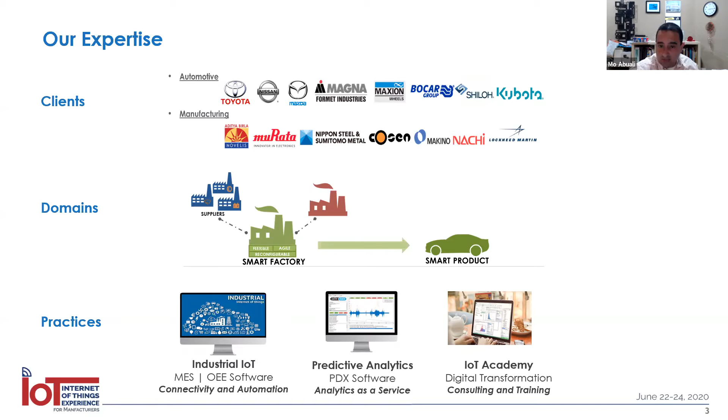I personally have been in the industry for about 20 years. I've worked with companies like Toyota, TMMK, and conducted projects with a lot of automotive tier suppliers, many large, but also many smaller manufacturers, like the Detroit Manufacturing Systems. Isaac will introduce the company later. It's a mid-sized manufacturing company.

So our agenda for today is really four things. I'm going to preface the presentation by giving some introduction and definitions around what is the Internet of Things, what is industrial Internet of Things, and what is the role of technologies like predictive analytics, OEE, and manufacturing execution systems. We want to talk about digital tools that can support any manufacturer to mature their digital journey in a phased approach, keeping return on investment in mind.

And then I'll hand it to Isaac, and he will discuss his journey, personal journey, and the journey of his organization, Detroit Manufacturing Systems, along digital transformation.

So let's get started. The field of Internet of Things is by no means a new field. It has been around for many years, many decades. We've been monitoring safety critical assets, machines, and components for many years, even though it was not called IoT, but there has always been the use of data collection, the use of the internet, and the use of connectivity to collect data from jet engines, trucks, airplanes, homes, cars, power plants, nuclear operations, etc. So the Internet of Things is a field about using internet connectivity and analytics to cover all industries, all things, and all devices.

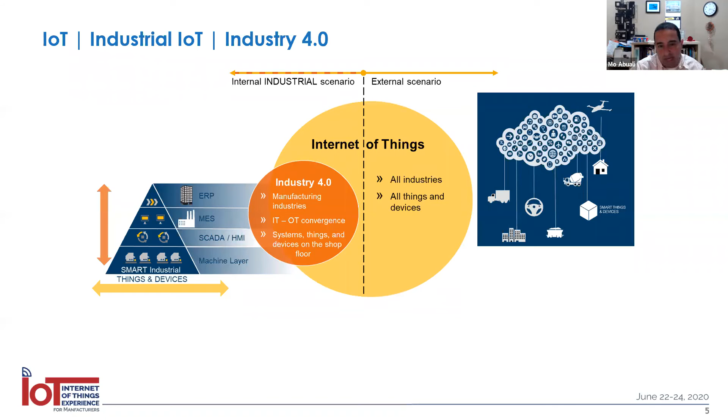Merging and converging information technology with operational technology, IT and OT. Later, Isaac is going to talk about their story of how they were able to make that convergence happen between IT and OT. So Industry 4.0 is a strategy, an initiative for manufacturers today to start adopting industrial IoT practices and improve productivity.

So in a nutshell, when we talk about an Industry 4.0 or digital transformation strategy, we're talking about 4 pillars that manufacturers today should keep in mind as they evolve their maturity on the digital horizon. We usually start from the right and go backwards. We start from the ROI, the return on investment.

So what is the business case? I will show some examples of improvements in uptime, improvements in OEE, reduction of scrap and quality issues, improvement of spare parts. Technology adoption and digital maturity must be able to impact your business bottom line, which is your P&L, your profit and loss statement.

And then we go backwards to connectivity. Are you connected? Are you collecting the right data that is meaningful for the business case you're trying to achieve? Next, we talk about analytics. Now that I have the data, what do I do with the data?

How do I have real-time metrics? And how can I predict future behavior or future issues down the road? Once the strategy is proven on a smaller scale, maybe a pilot scale, we talk about scaling that technology. We talk about architecture, rolling it out to more machines, more factories, more geographies or continents across the world. So what's the technology architecture of scaling that solution?

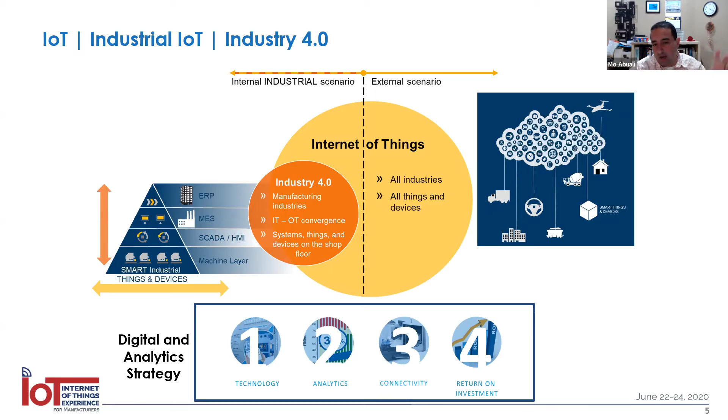So your business case, getting connected, doing analytics, and deploying the right architecture for the technology. These are the 4 key items I'd like to touch upon. And then Isaac will educate us on how practically they were able to do this within their operation.

Different organizations have different namings. GE refers to it as the Brilliant Factory Initiative, for example. But I want to give a very simple definition: Industry 4.0 is about combining traditional manufacturing practices today with the technological world. At its heart it's about technology and process, but also about people. The right mix of people, process, and technology, and how this transitions from an Industry 3.0 to a 4.0 domain, is our approach and how we see manufacturers being successful.

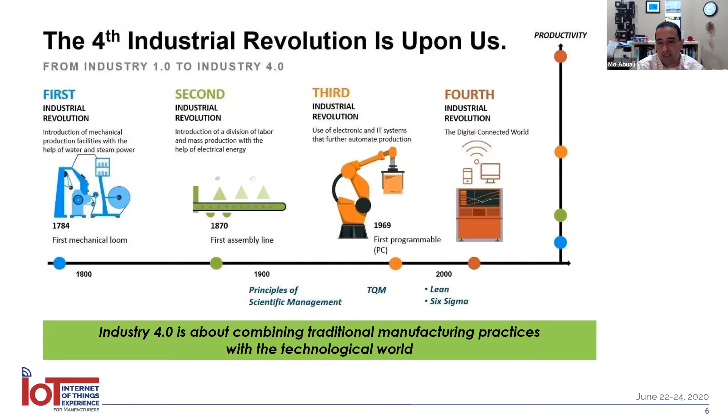We see a lot of manufacturing environments today starting to become more automated, moving from operator-controlled to operator-intervened, to even a lights-out manufacturing operation. I heard an interesting naming - they called it a dark factory, a lights-out operation that may not require operators to actually control the machines. So it's important to understand the maturity around the people side and the general strategy of evolving that element of the operation.

Then we talk about process. We're seeing a transition from reactive thinking, short-term thinking, manual processes, to a more proactive, scheduled, long-term approach to running your process, to even self-optimizing processes where data is connected automatically, decisions are made automatically, and decisions may be fed to the machine or line automatically, so the line can have a self-optimizing approach to running the operation. So there's an evolution on the process side, and then there's the evolution on the technology side.

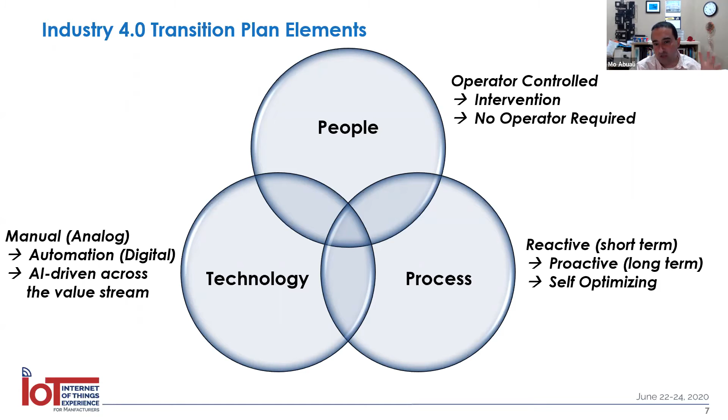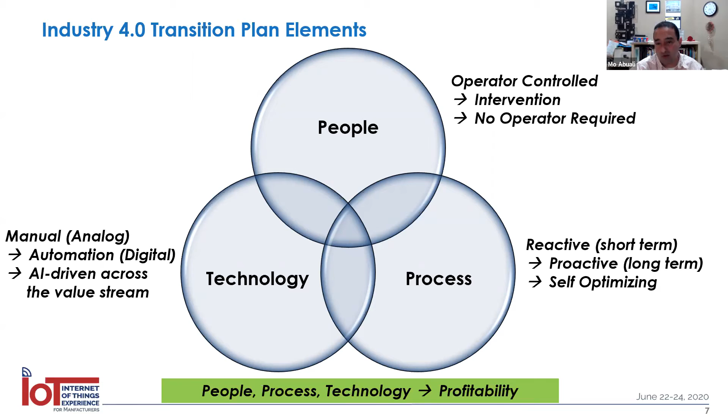But we believe that it's important to understand the digital maturity across your people, technology, and process. Usually the best transition or transformation to Industry 4.0 is governed by your weakest link. So if people is your weakest link, it's important for the company to focus there and make an evolution, versus trying to deploy technology in a factory where the people side of the coin is not ready. With the right recipe around people, process, and technology, there's a quicker approach to achieve ROI and profitability in your digital transformation journey.

So speaking of ROI, it's important to start with the business case, and it's important to track metrics. OEE, overall equipment effectiveness, is a key metric today in manufacturing. By collecting data and having visibility, and delivering the right information to the right person at the right time, the OEE metric is a key metric to be tracked in real time and to be improved.

Predominantly, uptime is a key metric within OEE - availability, performance, quality. So uptime is a key metric for some operations. We are also looking at using analytics to improve maintenance activities. By catching, detecting, and reducing unplanned downtime using analytics, there's a great opportunity to optimize maintenance activities and to move from a reactive maintenance environment to a predictive and preventive maintenance environment.

We see manufacturers tie into their spare part inventory by having a data collection and predictive approach to monitor their assets. There's no longer a need to keep a high value of spare parts waiting for things to fail. We see manufacturers using analytics to drive reduction in their spare part inventory and being able to be predictive in the replenishment of new spare parts.

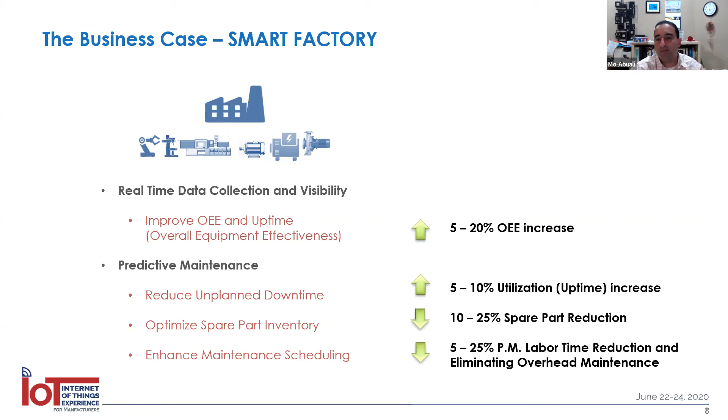We see manufacturers optimizing their maintenance schedule, moving from a time-based and reactive maintenance approach to a more usage-based, predictive, proactive maintenance approach. And the numbers I'm showing here are true numbers from manufacturers today, large and small, who have embraced analytics, connectivity, and data collection.

And they have seen immediate improvements anywhere between 5 to 20% in their overall equipment effectiveness, 5 to 10% in their utilization, reduction in spare parts of almost 25% by being able to optimize maintenance and use analytics, and reduction in labor time.

When we used to work in automotive plants, when you go and fix a machine, you have a very strict time-based schedule, and you would go in on a robotic, for example, and change the bearing in all 6 joints of the robotic. But now that we're able to sense data from the robotic and predict that a specific joint is going to fail before it fails, you can reduce the labor time, fix the right area in the robotic, and reduce your spare parts.

So it's a maturity curve, a phased approach for your digital journey, but it all starts by getting connected, analyzing the data, and making proactive decisions. Some manufacturers have eliminated overhead maintenance. Due to the time-based schedule of maintenance, they used to run maintenance on weekends, Saturdays and Sundays, but using analytics and making optimizations, they've actually been able to eliminate weekend maintenance and drive a just-in-time maintenance approach to their factory.

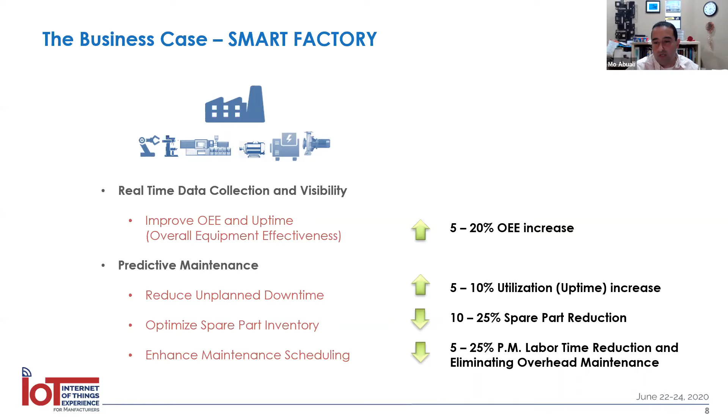So start with the business case and have the business case dictate where you are today, and then what technologies should be enabled to support you to digitally mature in your journey.

I want to touch on a few technologies just to give you a feeling. I want to touch on connectivity to the machine layer. I want to touch on data collection and metrics. I want to briefly touch on manufacturing execution and predictive analytics. I want to give a hint to some of the digital tools that are around today.

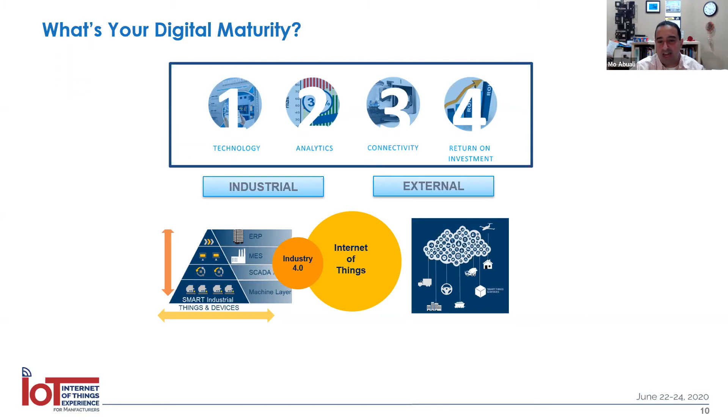I'm going to start from industry 3.0 up to industry 4.0 technologies. The reason I'm doing this is, we believe those four pillars you see here are indicators of your digital maturity.

We have an assessment approach when we work with clients where we do a digital assessment. During the assessment, we evaluate and benchmark where the manufacturer is regarding connectivity, acquisition, metrics, and MES, using that to create a digital readiness analysis and report to support the manufacturer moving to the next level of the maturity curve.

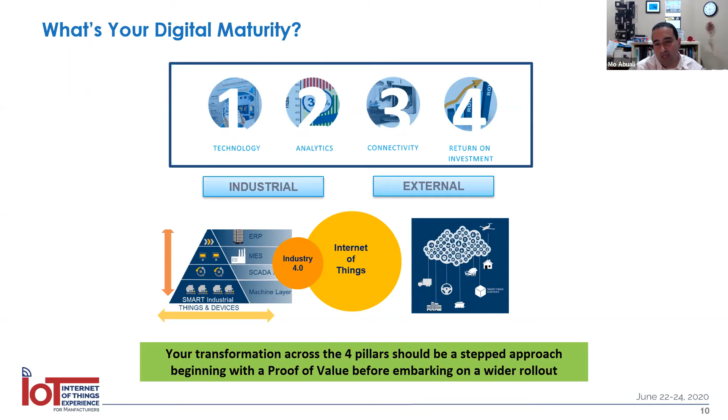So ask yourself, and you may already know the answer, what is your digital maturity today across those layers: your machine, your data collection, your execution, and even your ERP? Let's start at the bottom of the pyramid.

Connectivity. Some say manufacturing data is the new oil. Manufacturing data is the foundation to achieve ROI. It's very important to have a data lake, and that data lake should be able to support multiple systems you have, be it your OEE system, your ERP, or your execution system.

When we go in, we look at and ask a few key questions. Is the machine capable of communicating today? It's important to understand that in any manufacturing facility, there are new machines and older machines. Some machines have an Ethernet port. Some have been around for decades—they're still running, still making good parts, but they're legacy machines, and there has to be a way to communicate with those machines.

It's important to look at the network side and the cost benefit of networking and cabling the machines to make them IoT ready or IoT enabled. We also look at time—how long is it actually going to take, and what is needed on the machine, and externally on the software side, to communicate to the machine?

The most important question at the end is: what data do you need from the machine? So what is the use case? And the use case dictates the type of data that I need to capture from the machine. I'll talk about some examples here.

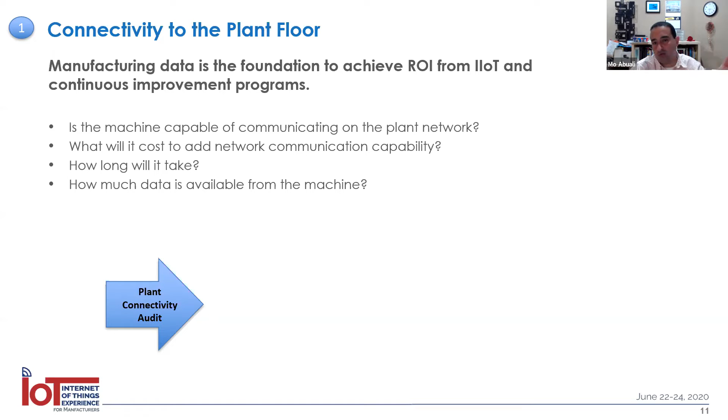Then we have a connectivity process that we follow. We look at network readiness—does the machine have an Ethernet port? If so, is the machine connected on the network? If yes, what is the data map that I need to capture from the machine? What are the signals or tags that are indicative to the OEE, or to the use case, that I'm trying to derive from the machine?

If I'm looking to capture real-time OEE on a machine, for example, I'm looking at the cycle start on the machine, machine on/off, a piece counter, maybe a reject signal from the machine, and the fault code—what are the fault codes or warnings happening on the machine?

So there are specific data maps or data models that are important to identify, and those data models are then made available using a data lake, a historian, an OPC server, or an MTConnect agent. There's many ways—it's dependent on the machine type, the capability of the machine, the age of the machine, and so on.

But it's very important to make your assessment here on the connectivity side, because connectivity is your foundation, and connectivity enables the rest of the systems to go in place in the right approach as you mature your operation.

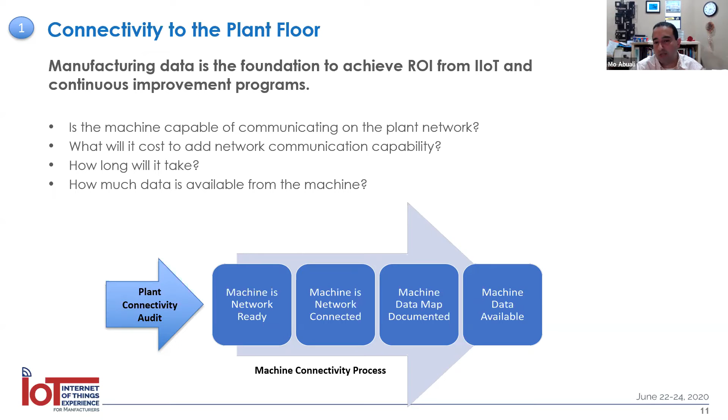So now that we're connected, the data starts flowing, and it's used to drive real-time metrics to the manufacturing operation. We define two types of metrics. Performance metrics historically give you an indication of your overall equipment effectiveness—that's your OEE per machine, per line, per building, per plant—and enterprise level benchmarks.

And don't get me wrong, there are many other performance metrics as well. There's your mean time between failure, your mean time to repair. Some folks use TEEP, total effective equipment performance of the machines. And then we talk about predictive analytics, the health of the machines, predictions of issues that might happen, remaining useful life. When is my spindle bearing on the machine going to fail before it actually fails?

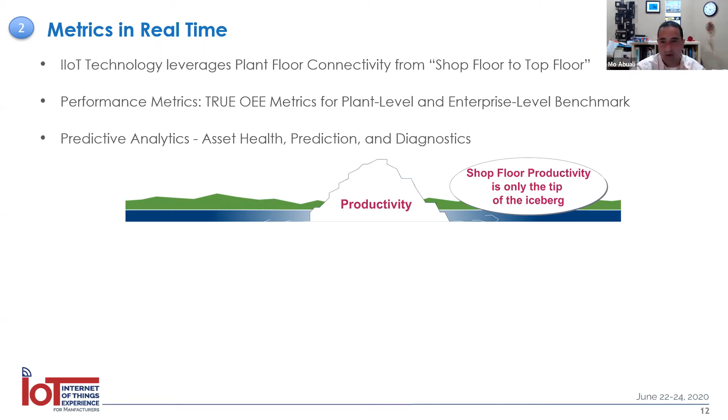So if we look at it from a simple iceberg chart, a lot of folks are measuring productivity today. They're measuring pieces, how many scraps, how many hours the machine was running. But if you look under the surface of the water, we're talking about unleashing the opportunity in the hidden factory.

We're talking about metrics that drive productivity. We're talking about uptime, real-time uptime coming from the machine controller. We're talking about performance, measuring the speed of how long it took you to actually run a part.

Your ERP is a great solution. It's telling you that your standard time to run the part is 30 minutes. But how much do you trust your standards today, and how can you improve your standards?

By communicating to the machine and tying the shop floor to the top floor, you're able to clearly understand machine runtime, part runtime, which is your performance, and quality—how many pieces, how much scrap, what was the reason for scrap or rework, and in some cases, additional quality information and measurements.

And then you have below that, the health of your asset. Is my spindle bearing on the machine going to fail? The remaining useful life of your asset—how many days or weeks is it going to take for this to fail? And diagnosis: what is the root cause? Is it the inner race of my bearing, or the outer race?

So even though some manufacturers are measuring OEE today and have a good level of maturity, running 90% OEE, 85% OEE best in class, the machines still fail. And when the machines fail, there is unplanned downtime and issues with spare parts and maintenance. So we see those folks that are measuring OEE and having a high level of digital maturity ready to embark on that journey using AI and predictive analytics.

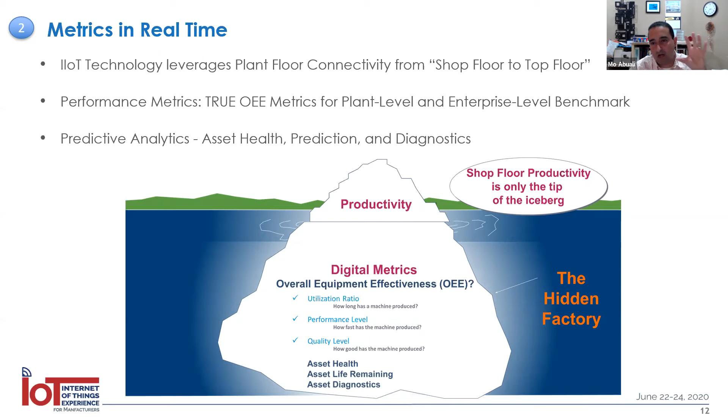So metrics—what metrics are driving your business case based on the connectivity? And then you have visibility: visualizing your overall equipment effectiveness, integrating data from the factory floor together with data from your enterprise resource planning system.

We're talking about solutions—many solutions available in the market today that give you a web-based, mobile-based experience so that every role on the factory floor is clearly aware of planned versus actual.

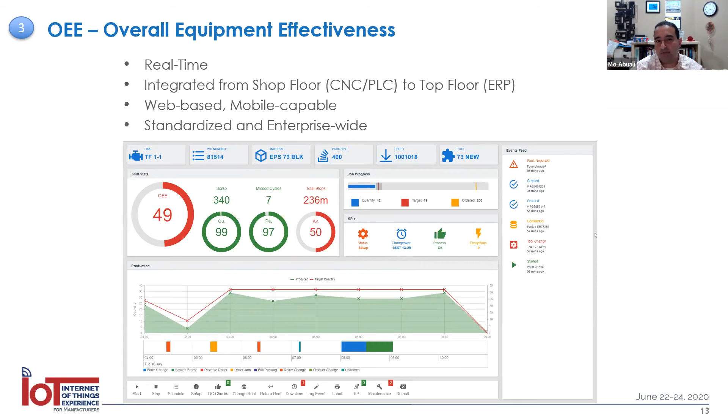Then we talk about expanding. We talk about the MESA organization, which runs manufacturing execution systems. It's a global organization, and they categorize execution on the factory floor in four buckets: production, inventory, quality, and maintenance. OEE is the start—that's your production operations.

But how about traceability and genealogy of my part, especially in aerospace and automotive? If I have a recall or a warranty issue, how do I trace that part back? How do I have a birth certificate of my part from the raw material through every operation, every machine, every person, directly to the end product that was shipped and maybe placed inside my car that is running on the streets?

So traceability is key. And at the end of the day, these manufacturing execution functionalities like traceability, quality, warehousing, and maintenance are modules to your manufacturing execution that can be enhanced and added over time as that digital maturity improves and as the level of connectivity improves over time.

We also believe and see in the industry today the use of templates.

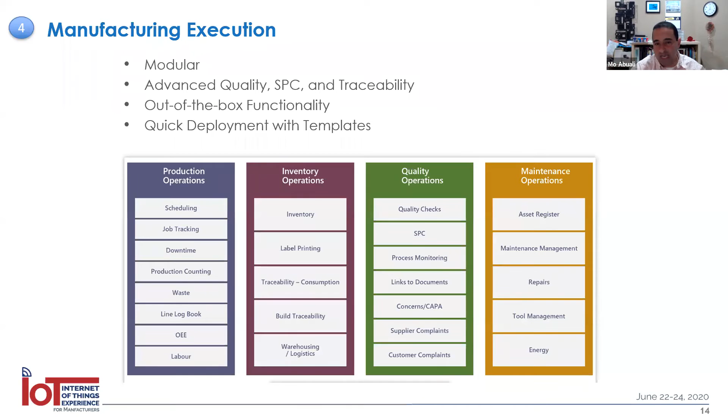Gone are the days where you have a toolbox and you have to develop and create things from scratch. There are many out-of-the-box solutions today for large and small organizations that are very affordable, can be deployed rapidly in weeks, and deliver value in days and weeks, not months and years.

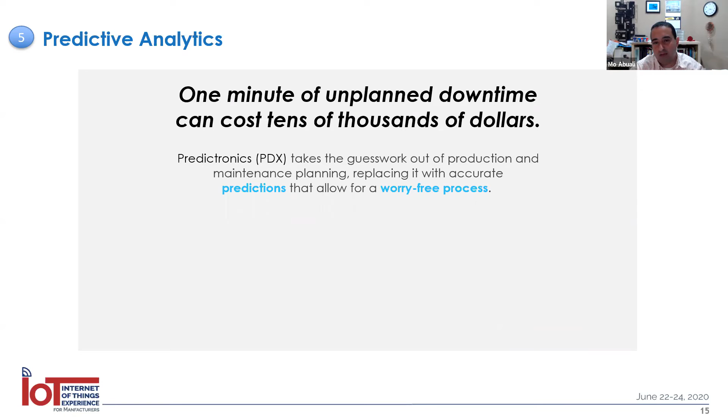Now, the last piece is predictive analytics. So now we've gone through connectivity, metrics, OEE, manufacturing execution. The tip of the iceberg, the holy grail maybe for some more mature manufacturers is, now I have the data, I have the data lake. I want to start doing predictive maintenance. I want to predict issues on my machine before they happen. I want to start doing prescriptive analytics and predicting quality issues on my part before I make a bad part.

So now we're talking about tapping into that same data lake and using pre-built solution templates, artificial intelligence, machine learning, and advanced mathematics to deliver more value to the manufacturing organization.

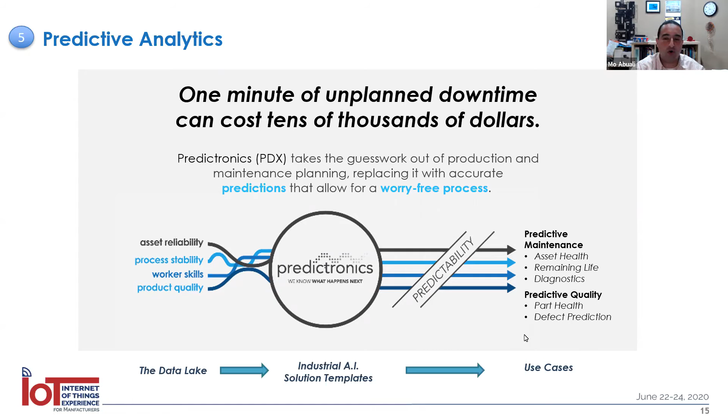When we look at manufacturers today, we see a variety of processes: high volume, low volume, high mix operations, low mix operations. We see capital intensive industries with a lot of robotics, CNC machines, casting, stamping, ancillary equipment. In our domain of experience, coming from manufacturing, we have an industrial data science team who really excels at using vibration sensing and data coming out of the control to give more insights into what's truly happening in the machine.

Is my axis on the robot going to fail, and when? Is my spindle bearing or ball screw on the machine degrading, because that degradation might lead to an issue on the machine? My casting equipment is very complex - I have 50 to 100 process parameters being captured in casting and molding. There is a direct correlation between the casting parameters and the health of my injection rod in my injection molding machine and the health of the part being produced.

If one of those parameters is out of spec, it might lead me to make a bad aluminum cast or a bad plastic mold. So by using analytics and correlating process parameters and machine parameters with quality data, we offer more insights into predicting machine issues and quality issues on the part.

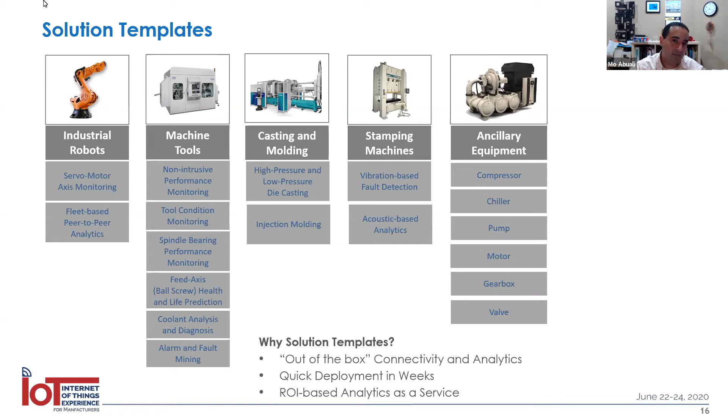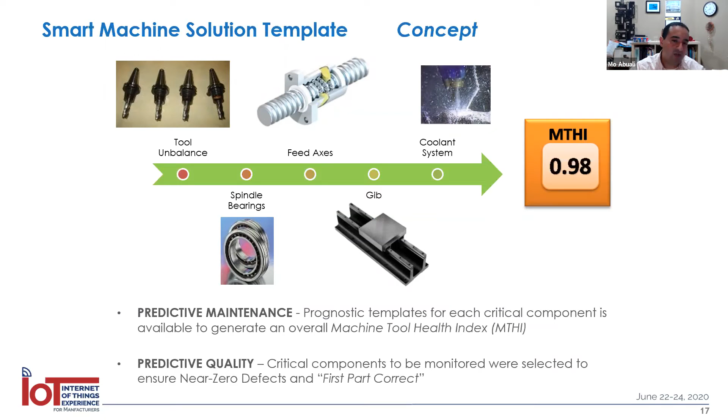If we look at just an example here for a CNC machine - we're talking about a complex machine with multiple components that might degrade, including bearings, your ball screw, your feed axis. But the end user here is the maintenance organization.

Once the data is captured from the machine, the maintenance organization is looking for an intuitive way to understand: is the machine performing? Is it degrading? What is the reason for degradation? And when is the machine going to fail, before it fails, with accuracy?

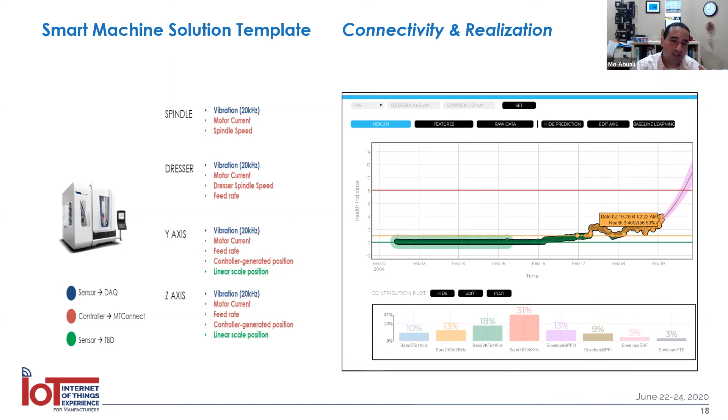So those are technologies we see across the way when we talk about getting connected, visualizing the data and the metrics in real time and tracking them, getting to a full manufacturing execution with trace and quality and SPC, and then using that data to drive your predictive analytics journey, maybe for the more mature organizations. And to do all this, there has to be a team behind it. There has to be a business case established.

I'd love now to hand it to my good friend Isaac Bennett from Detroit Manufacturing Systems to talk about his journey and his level of maturity, and give you some insights on how they went through that journey to success. So with this, Isaac, floor is yours.

Thanks, Mo. Let me turn my fan off here. We're kind of living in a new normal, so forgive me. I have a window open behind me, you might hear some birds. And I got 3 kids and a dog, so hopefully we get through this presentation unscathed.

My name is Isaac Bennett. I'm the head of IT right now at Detroit Manufacturing Systems, which is a cool little story, and I'll tell you a little bit about that. About 18 years of IT experience, and I've been in the automotive industry for 9 years, almost a decade.

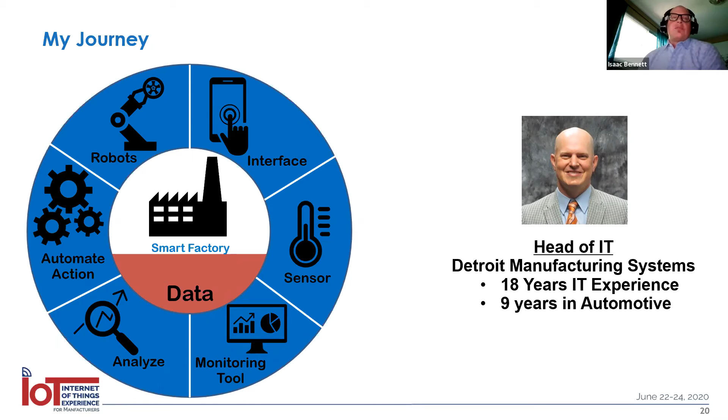Detroit Manufacturing Systems, founded in 2012, is a pretty young company. It was founded with the idea of bringing manufacturing back to the city of Detroit. It's a joint venture with Faurecia, which is a bigger tier 1. We have plants in Detroit and in Toledo, and we're a world-class tier 1 component manufacturer. Core business, you can see the pictures on the left and the right. In Detroit, we are doing a lot of value-added assembly, just in time, just in sequence stuff with Ford. You see the cockpit there and center console, same with the Jeep products in our Toledo facility. And we have in Detroit about 30 injection molding machines where we're doing some molding for some of those parts that we put in the vehicles.

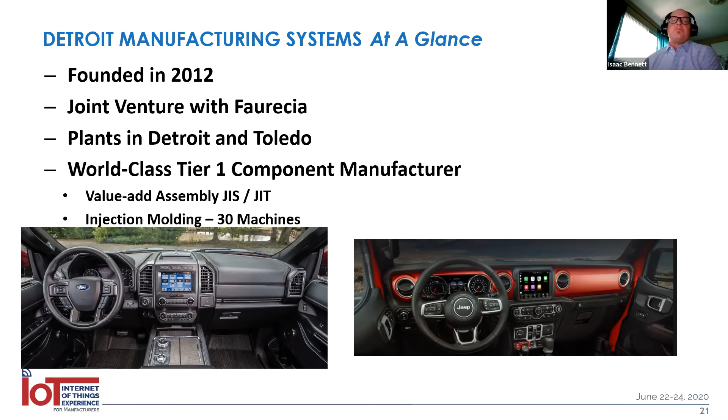I'll tell you about my journey. I've only been with DMS for a little over a year, so a lot of the things I'll reference are from my previous experience at a different company, but I think the story rings true. So a lot of these slides, I'll probably be telling a story and trying to describe my journey to you so that it can be relatable and you can kind of grasp onto some of the concepts and ideas. And I would say a lot of the stuff that I'm going to talk about goes along with a lot of stuff that Mo just previously talked to you about.

I had the opportunity to go and be an IT manager in our company's facilities in Europe and South Africa, managing the IT people who were working directly on the manufacturing floors. I would meet with leadership as much as I could to get messages from them because I really wanted IT to be a business partner. And the messages that I got consistently were: we need more help on the plant floor from IT. So when I came back and I was sitting in an IT strategy meeting, a global strategy meeting with the company, I brought that fact up, that the plants were really wanting more technology and more help on the plant floor. And I was tasked with going out and finding what that solution was.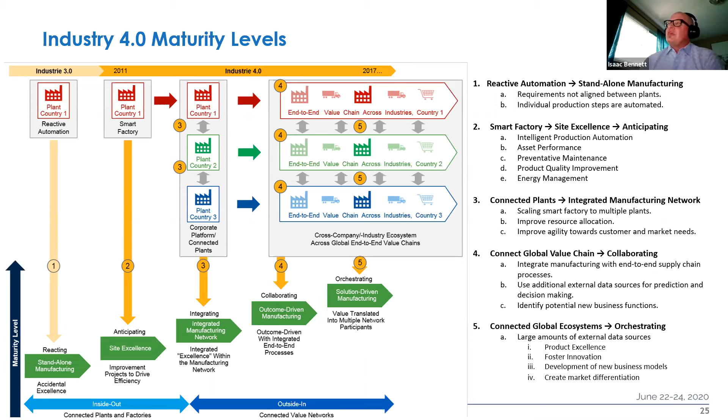The one big thing for me being an IT guy, is we learned really quickly that in a lot of manufacturing facilities, the IT guys work on the enterprise, the ERP system, they work on the back office systems, but a lot of the IT guys are not touching the OT domain, which is the operation technology domain.

And if you don't have an MES right now, that's a great tool to put in, for measuring your performance on the plant floor, gathering OEE, visualizing data, but it's also a great tool to get your IT department and your operation technology guys together in a room, figure out how you're going to implement something like that, and then figure out how you're going to get the data off the plant floor into other tools in the back office, into your ERP system.

But there's definitely been a divide between the IT people and the operations people. That gap is shrinking fast, and there's so much technology going into the plant floor these days that you've got to have your IT people hooked up with that. So we're talking about collaboration again, making sure IT and operations work together, that's a great example of collaboration. If those guys are working together, how much more you can get done and how much more value you can get from your plant floor system.

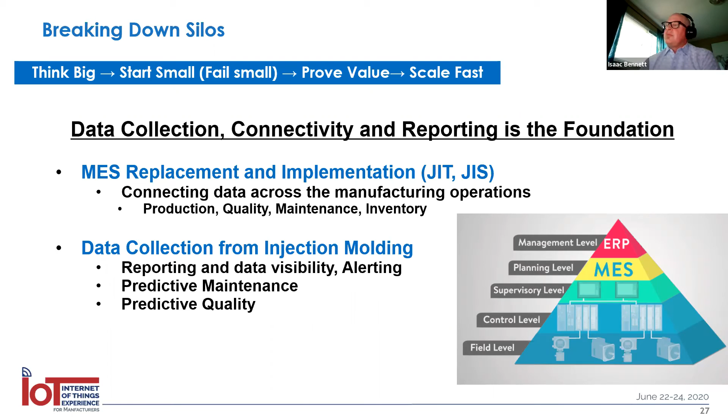You can go to the next slide, Mo. So here you see an example of an MES system that we have in place, with performance analytics. We're going to have some new technology for tracking and barcoding, and it does some RFID with our employees. Standard reporting is really important too - it's going to track our cycle time, our OEE, our downtime, and our product birth certificate history and things like that. This is just an example of one of the MES stations at our facility.

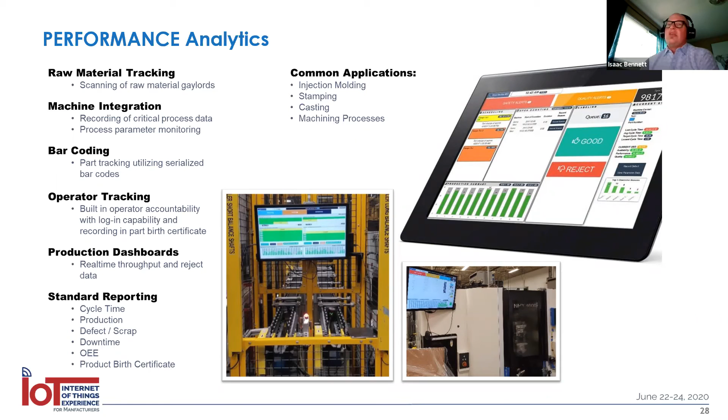Yeah, so then what do you do once you start collecting the data? We talked about it with the injection molding - start generating machine health, we can see how healthy the machines are, and Mo talked in depth about what we can do with that, what's under the iceberg. So you can visualize it, we can collect it, but getting under the iceberg and figuring out what we can do with that data - can we use AI and machine learning to see what's going on with the data?

I'll give you a perfect example from a facility in Akron, Ohio. We walked into that facility - it's an older facility with very old machines, probably 1950s, early 60s steel stamping machines. There was one line with a particular issue where this roll forming machine would go down, which would stop the line and cause big issues. When we walked in and presented Industry 4.0 - really about connectivity and where the data is - we wanted to evaluate where they're at. They said this one machine is an issue, so what can we do? We took a deep look at that machine, narrowing it down to just the top tooling and lower tooling to see what we could do for machine health and predictive maintenance.

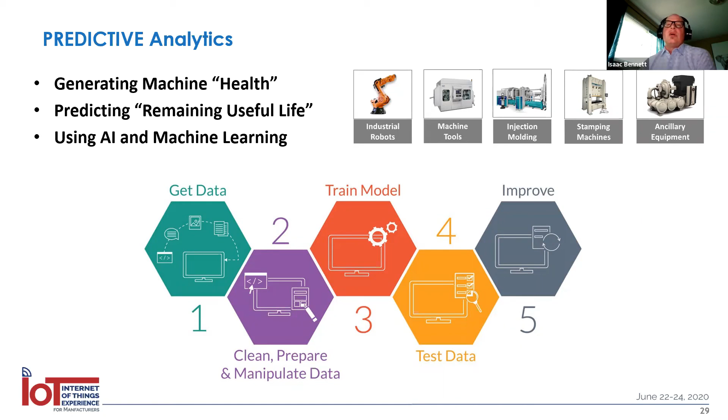I'll continue here. With that in mind, I learned pretty fast in this process that I always heard when I started, look for the low-hanging fruit. I'm honestly not so sure that's true. I think you want to look for the biggest bang for your buck - that's the thing you want to look for.

Industry 4.0 is a very complex idea with a lot of different scenarios and different technologies involved. If you think about it as the whole concept, you can get really stuck, stuck in this perpetual science project where you're trying one thing out, then another. What I learned quickly, just like going into the Akron facility, is if you find one area that's a big bottleneck or a big problem that you can replicate in other machines or facilities, that's what you really want to go after.

We talk about ROI. Think about if this machine breaks, what's going to happen? Or if this machine starts misbehaving and we have bad quality, how much could that cost us? My thinking was to look for those specific ideas but have the big picture in mind. So think big, start small, prove value, and scale fast. Have the big picture of Industry 4.0 in mind, but then look at very specific problems.